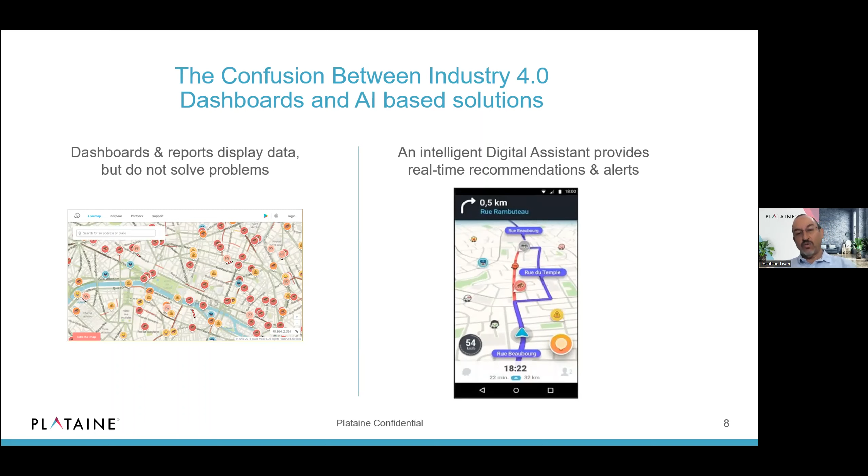So what's the opportunity? First, collecting everything in real time so you'll know exactly what's happening on your production floor. Then providing recommendations - I'll give a few examples now. Recommendations can come from many points of view. For example, you're cutting - an order came in and you're starting to nest it, but the person nesting doesn't know that the mold went for maintenance. So maybe he should nest another product - and which one should he choose?

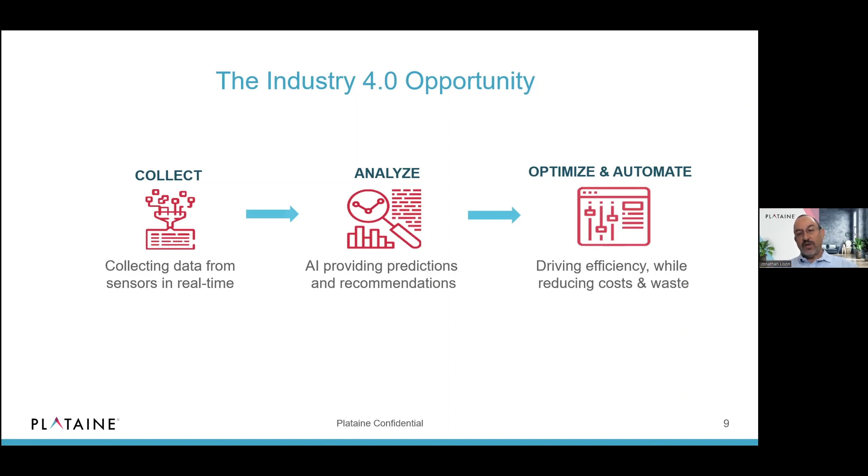The next one in line, or the one whose material is going to expire by the end of next week - if he doesn't nest it now, he should go into that. So all these recommendations, the artificial intelligence can help you with, and that at the end of the day drives efficiency, reduces cost, reduces waste, etc. I'll show a few examples on that.

So once you have a system with Industry 4.0 and artificial intelligence, usually this would be a cloud-based system because you need a lot of computing power. You will put sensors on the floor in order to automatically know what's happening and not depend on your workers, and not waste their time entering what stage they are in, what was done.

And then you will connect the system to your supply chain as well. So once you have the whole production from supply chain until delivery in the system, you will start to get a lot of information from the digital point of view.

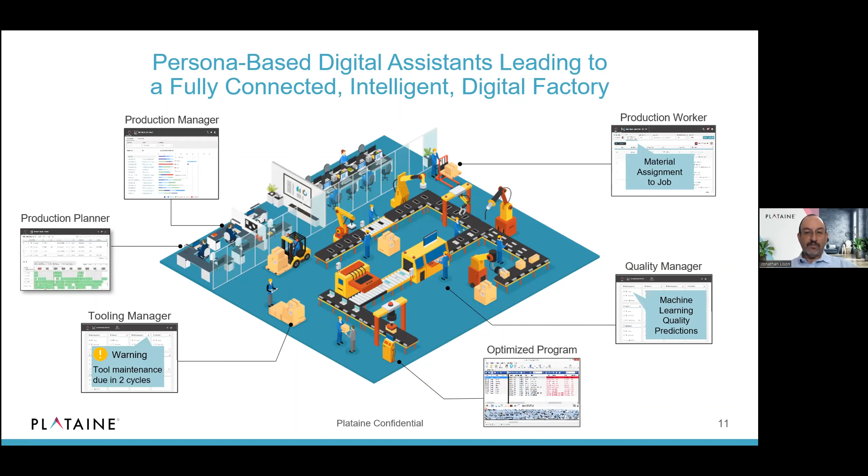So how can artificial intelligence help us in this direction? First of all, of course, the idea is that it improves productivity and improves your throughput, and I'll show a few numbers as we go.

Digitizing the process is not only improving the quality, it's also the issue of traceability. So if I find that I have a problem in a product, I want to immediately know, is that because the tool didn't have maintenance, the mold didn't have maintenance in time, or is that a supplier of the material? Once I find the reason, I quickly want to know any other parts that I produced with the same material or the same mold, and check them out before it goes to the OEM. Because if a defective part gets to the OEM, the cost is not only the cost of one roll of material, it's much higher, as we know.

So the issue is to get complete production control, reducing your rework. If you know in advance that there's a problem, you can solve it before it happens. And all this helps you to be on time.

Artificial intelligence supports your decisions and makes recommendations. And the fun part about it is that it makes recommendations, and if you take a different decision, you override its recommendation, it will learn that. And next time, it will understand better what it has to recommend.

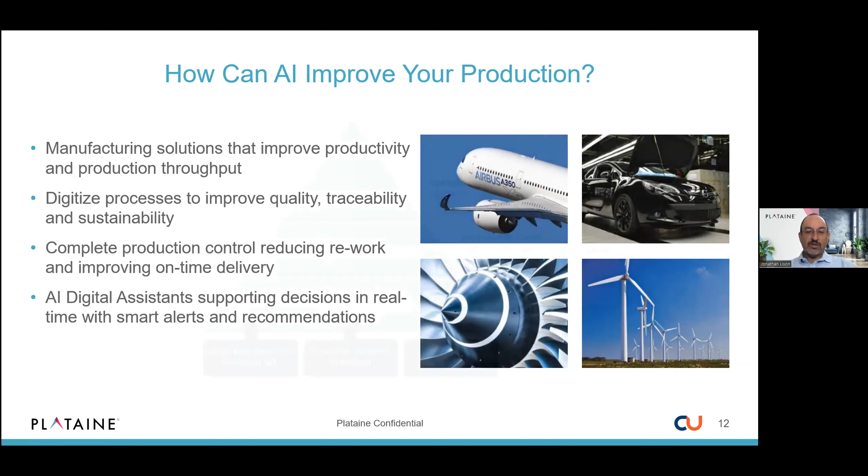So the idea is to collect from the floor using sensors, not depending on the workers as much as you can, not to depend on input from the workers. This is taking their time, and they sometimes forget to notify you. Get all the data from ERP, from the MES, and from your suppliers. Once you've done that, you have what is called in the field a digital twin, and the system starts analyzing, starts learning, and can start giving recommendations in real time and actions.

Now let's go for an example, and I'll give a few examples so you understand what I'm talking about. In composite, we have the issue of managing time-sensitive material. A lot of companies do this in Excel, when they took it out, when they put it back, or when it went into the autoclave, and then they sit down and calculate.

But there is a higher level of working you can go to, and that is rolls coming from your suppliers can already have, for example, an RFID tag on them. Once they enter the freezer, the system automatically notifies the ERP what arrived, if it was the right material. It downloads all the digital information of each roll - end of life, expiration, width and length, etc. All this is done automatically. The only thing the worker has to do is roll it into the freezer. And if you go to a higher level, it can even say in which rack he put it inside the freezer.

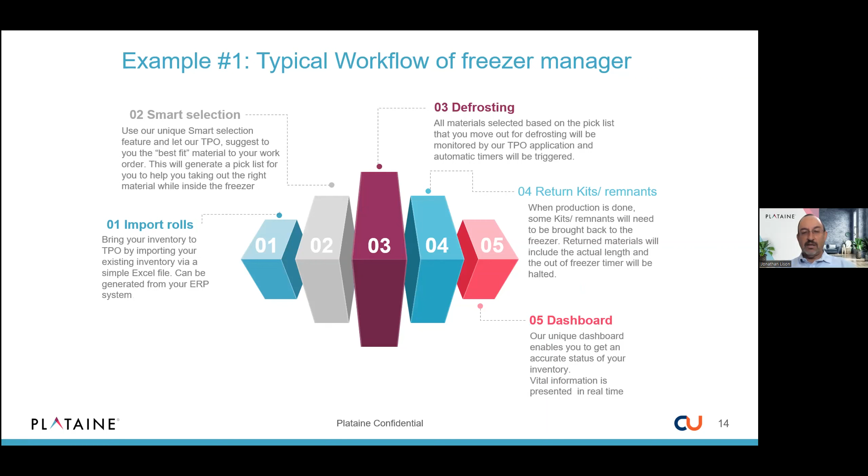And of course, dashboards to show you what's going on your production floor is very important, but that's usual stuff. I hope you're starting to get a little bit of understanding of where the artificial intelligence gets in.

And for example, when you're doing scheduling - it's very easy, and a lot of systems do scheduling, okay, and they do the plan of the week. But the idea is, then the next week they see, okay, what did we really produce? What is left that we still have to produce? And they add on that the new production orders that they need. But if you know exactly where the material is on the floor, so you know which stage you're at, the scheduler can adapt itself in real time, and you can know exactly what's going on.

Now it's a lot of information. You're producing a lot of parts in parallel. So you need the system to alert you where there is a problem. This product should have already been nested if you want to go out in time. The mold is waiting to go into the autoclave and it has 5 hours left. If you don't put it in, you're going to have a problem, for example. Or there is a delay.

Now, if there's a delay, or one of your CNCs is not working, what should I do instead of that? What is the best decision? So there's a lot of decisions that have to be taken, and that's where the artificial intelligence helps you and recommends. Okay, I'm always saying it's a recommendation because the manager at the end of the day can take his decision.

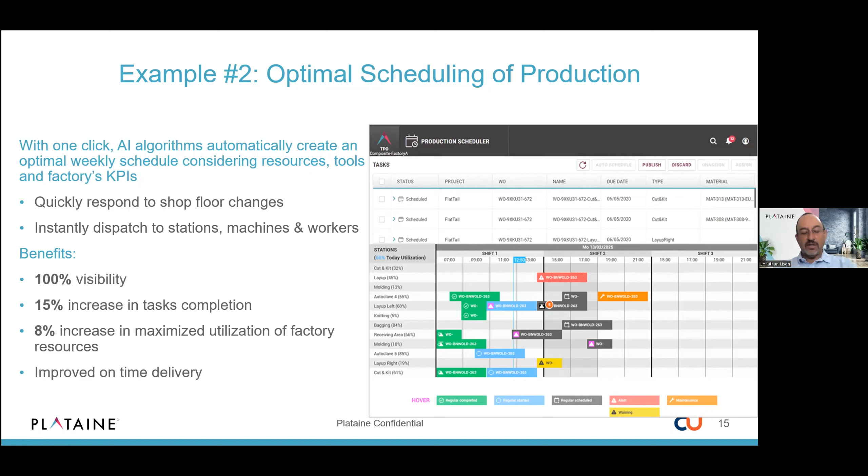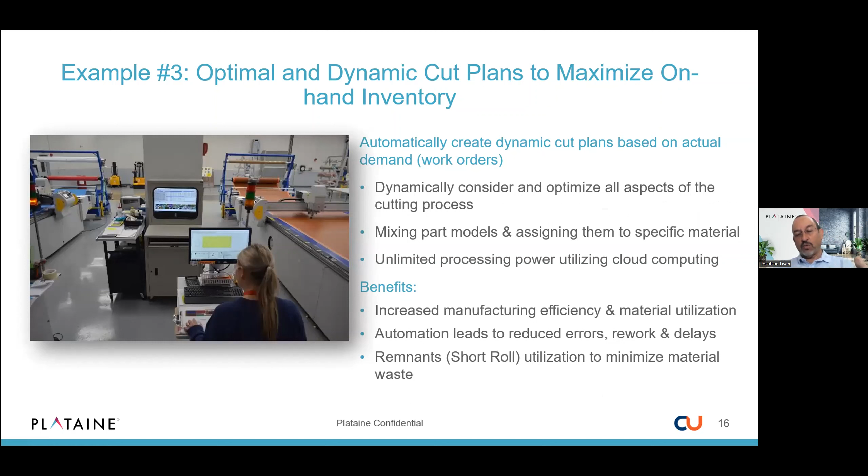I won't jump into this one. This is the issue of utilizing remnants and short rolls, not using static nesting. If it will be of interest, you guys can contact me thereafter. But the issue here is if you're doing smart selection to use up rolls, then you want to nest on the short rolls to finish them off and then go to the other rolls, and your system has to support that. But that's not our subject today.

This is just to show you that the easy part is when you have a problem, you tell the system, okay, I have this and this problem, what could be the reasons? And it will tell you, okay, maybe it's this material because I found that the same problem was produced with this roll in another product. Then you can go down to the roll, first of all, search other products that you made with it, and third, talk to your supplier. If the mold is causing the problem, you can understand that you have to change your maintenance sequence. But the idea is that it's very quick, and the system can recommend to you what could be the reason for the problem.

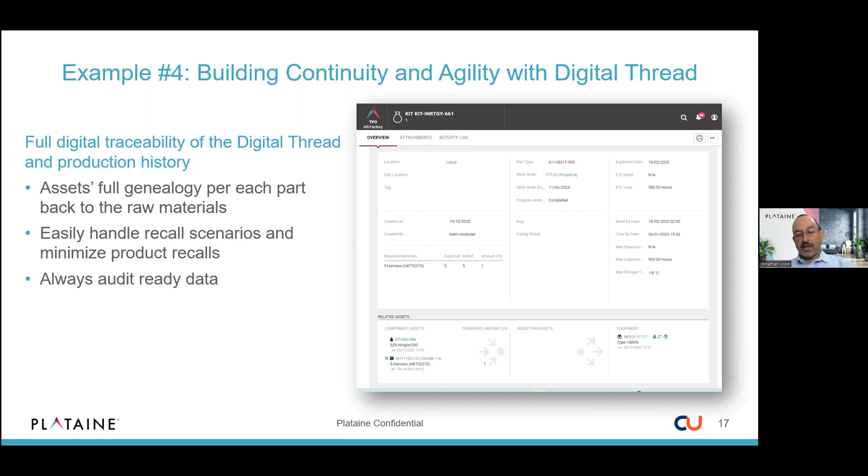So it's very easy to, and the information is inside, so it's very easy to find it and check it out. Let's say if it recommended a mold, but the mold is okay, you can tell it to carry on, and you'll find maybe one of the new workers is not doing the work right, and you have to train him again. These are the ideas - it also gives you recommendations on how to find the problem and where the problem can come from, because the information is there.

Having said that, first of all, the computer intelligence is the whole time increasing. I'm sure a lot of you heard about the GPT software where you can run things and it can do the work for you. Well, here we still have to do the work, but because the intelligence is going higher and higher, the dependency on skilled users and workers is decreasing, and that is making our life a little bit easier because it's hard to find good workers today.

The worker himself will spend less time on all the operational side of the production, because that can be done automatically, and he will do the production itself. The system will know when he started to do a product and when he finished it. If the material arrived into the clean room and a mold for that kit also arrived, then automatically the system knows that he's doing this product now. And when it leaves the clean room, it knows he finished the layup. I don't need the worker to tell me that's the situation. I don't have to depend on him, making it more automatic and allowing him to allocate his time for the real production and not for the operational side.

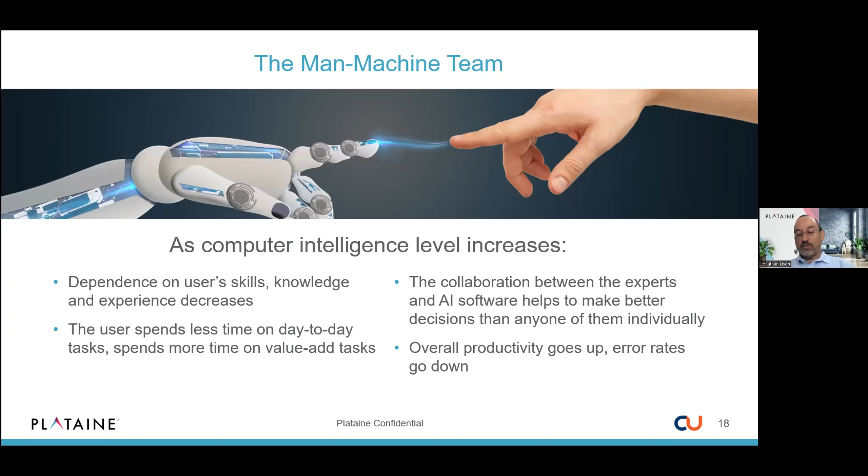So this is a case study that we did with Middle River in the US lately. This is an installation we did together with SAP over there. And you can see, have a look in the middle, the outcome.

This is what they said, and by the way, you can find this on YouTube, the CEO talking about this. So 5 to 10% overall improvement in material usage, 80% reduction in carbon waste, 96% first time yield in composite nacelle structures. That's what they're doing there, by the way.

And then they had a lot of stations where they could reduce the time from 12 hours to 3.5, and I don't know which station, so I'm not going to go into details. But you can see here not only that they are using the system, saving material, saving waste, getting things right the first time, they're also reducing a lot of time, which will help them to be on time in delivery.

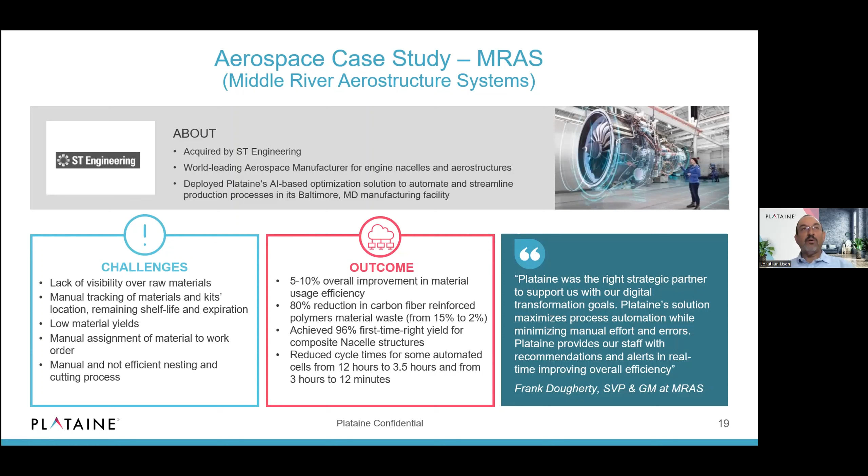Another installation that we have in Airbus, this is in the composite production in north of China. This was the whole project. You can see here at the bottom, 3.6% saving of raw material. That's what we calculated. By the way, these are very, very big parts, and that's why it's only 3.6% saving.

The interesting thing is that when they came back to us at the end of the year, they said the increase of throughput was already 2.5%. The reduction in scrap was 2%. And by the way, the numbers are already higher. This was a little bit amazing for us, because when we went in, it was just to save them material.

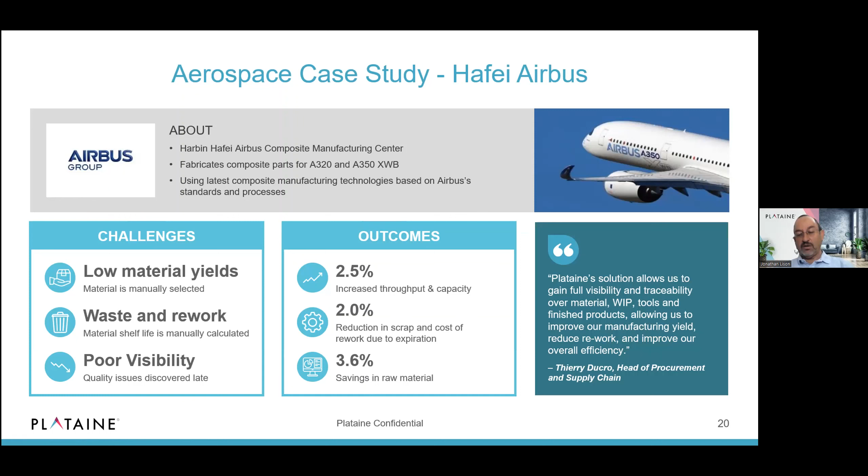So when we look and take into account the overall projects that we did, you can see here the percentages that we got, and you can see the benefit. So starting on the left side: throughput increase by 5 to 10%, rework reduction by 10 to 40%, and faster time of production by 10 to 25%.

By the way, for managers, operational managers, these things are amazing. And without even changing the number of workers you have, without adding workers, and with the same machines, you can get out of it much more.

Then you have cost reduction overall, because there's less rework, and usage of material is higher, so there's a cost reduction. You're using your materials better, so even the inventory is reduced by 10 to 15%. And the labor saving - when I say labor saving, it means you don't have to get new labor or additional labor.

That's a saving, because the same workers can do much more today, and their life is much easier with not so many reports as they have today. You have 100% production visibility, reducing the quality risks, and of course getting to 100% traceability, which helps you in the auditing, etc.

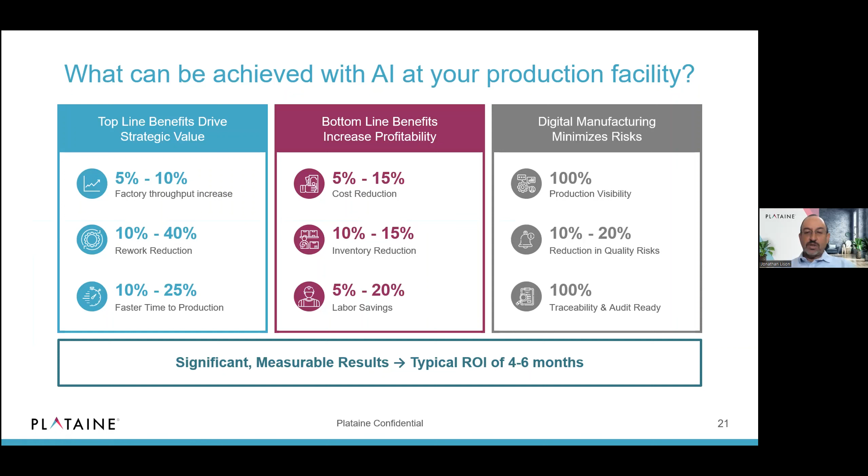So if I would like to summarize, to leave time for questions: artificial intelligence together with Industry 4.0 can address your challenges. I think digitizing the factory and making it much more visible is critical today than ever, especially in this tight arena where material suppliers are late, and being on time is very important. The greater value is achieved by increasing this automation because you're using higher levels of intelligence.

I think quantifying the benefits within reach and demonstrating the significant outcome is today much easier. When you take a decision to integrate an artificial intelligence system in your production, the managers will ask you, show me how much I'm going to save. So today it's much easier. In the past, it was much harder to quantify it, but today it's much easier to quantify it and see the benefits and demonstrate the significant outcome even before you have installed the system on the current production floor. And that makes the decisions of the management much easier to incorporate such sophisticated technologies.